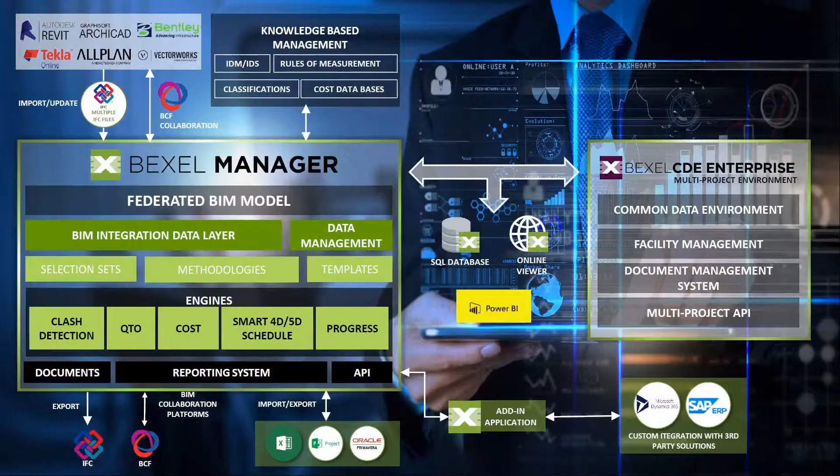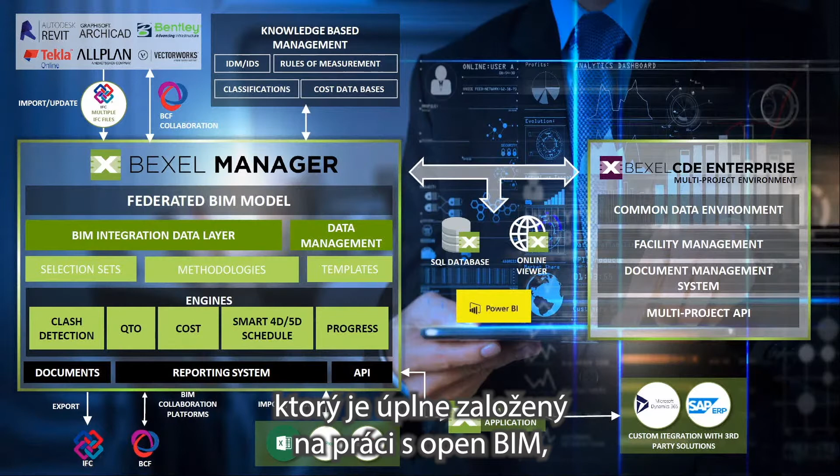So this is a bit complex system of BEXEL Manager, completely based on open BIM workflows, an integrated desktop and cloud-based application, what we say a single source of truth. From IFC-based BIM models, we have integrated clash detection, QTO, costs, smart 4D and 5D scheduling engines, progress monitoring, integration with various third-party applications. And today I'm going to show you the case study with the project where we are now finalists for buildingSMART International Awards. This is a large-scale residential complex in Belgrade, in our capital.

BEXEL Manager is used by a lot of top general contractors around the world, a lot of public companies like national railway and highway companies from Japan, Korea, Singapore, across Europe, Germany, Italy, Russia, and we are present also in the States and in Latin America. Our software is currently available in 7 languages, and we are working also on 8 new languages. Among them is Slovakian. We are developing this Slovakian version with our partners from Bratislava.

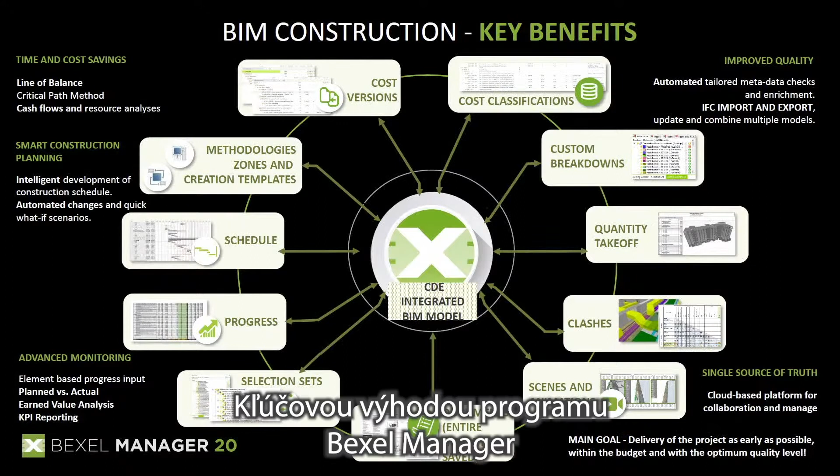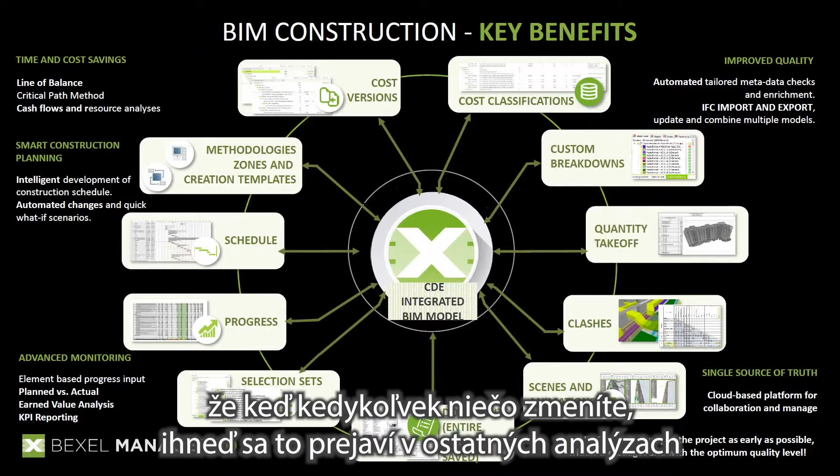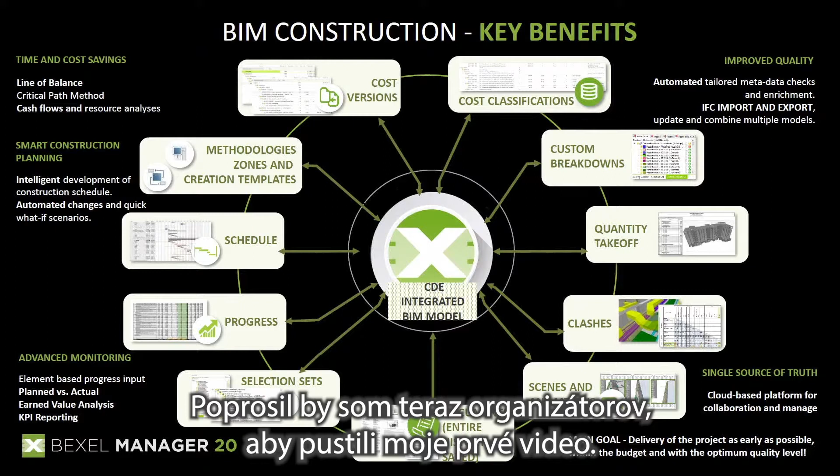So key benefits of BEXEL Manager are the integration of all data, from BIM models, custom breakdown structure, quantity takeoffs, cost analysis, and scheduling analysis in a single platform. And the biggest benefit is whenever you change something, the change has immediate impact on all other analyses, and you don't have issues where something is changed, updated, and something not. So I would like now to ask the organizers to start my first video.

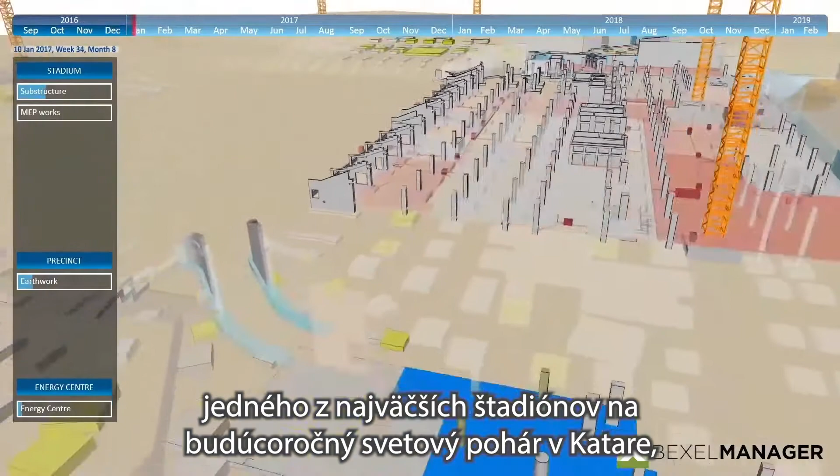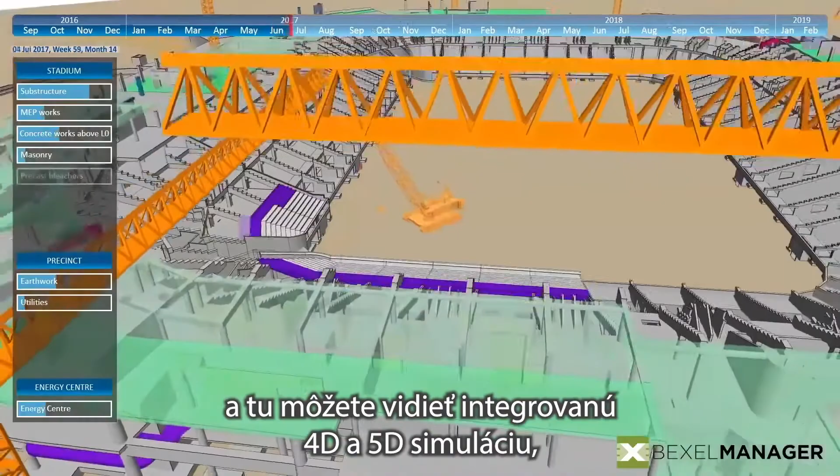In this video, you can see the 4D and 5D integrated simulation for one of the largest stadiums for the next World Cup in Qatar. This is a very complex model containing almost 1 million elements developed by 9 design companies, containing more than 100 IFC files. What you can see now is an integrated 4D and 5D simulation. On top, you can see the time scale. On the left-hand side, you can see the costs. The percentages are presented due to confidentiality of the information.

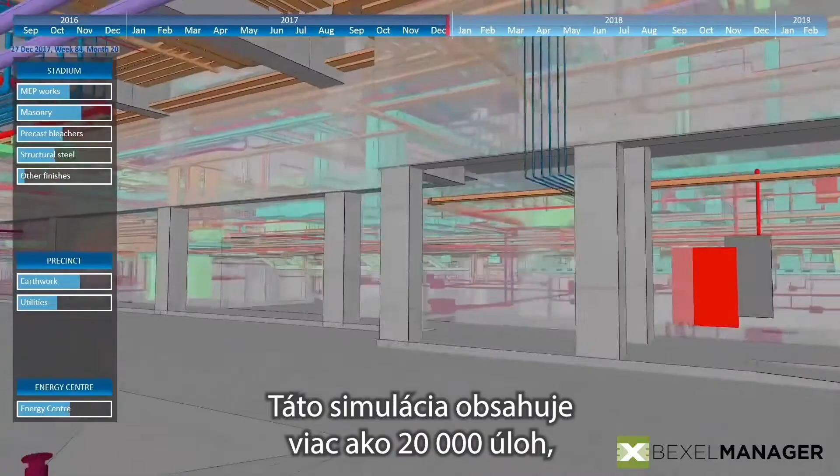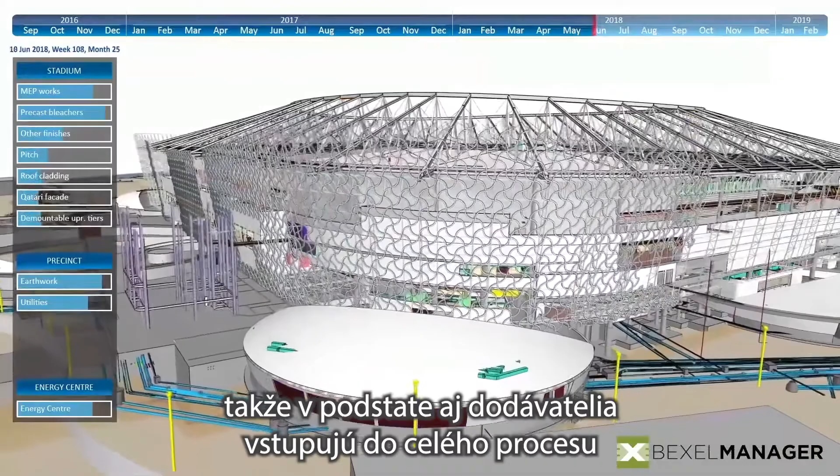This simulation contains more than 20,000 tasks, so extremely detailed, and the entire animation is generated automatically by using the BEXEL Manager intelligent 4D and 5D planning engine. This was used during the entire construction stage. Essentially the contractors enter the progress also by using the BEXEL Manager platform, and the various analyses were automatically produced directly in BEXEL Manager or exported to Power BI or Primavera.

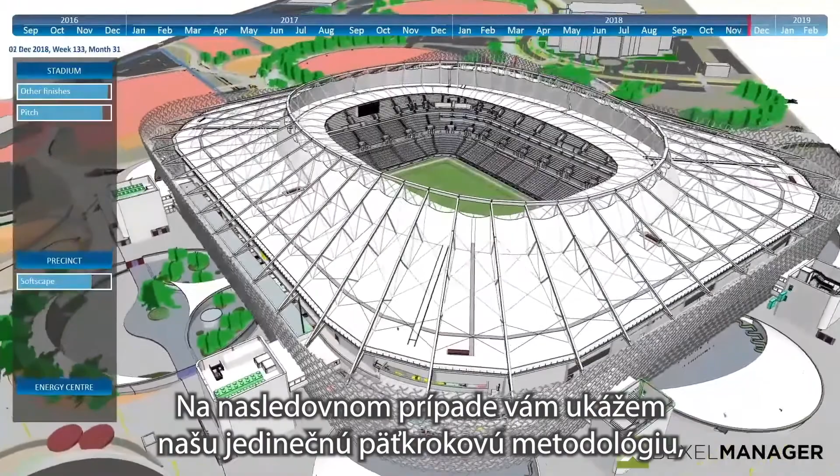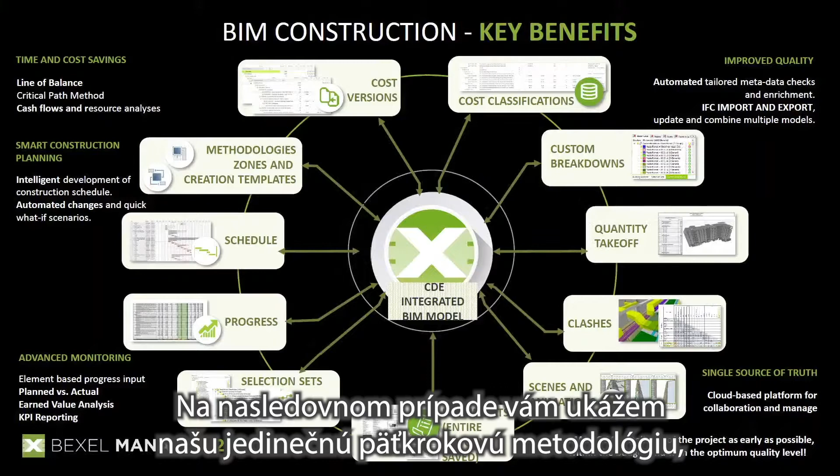So in the following live case study, I'm going to show you our unique 5-step methodology, where we start with the data integration, metadata checks, automatically generate quantity takeoffs, create cost classifications and budgets, define zones and methodologies, automatically create the schedule, and then track the progress and produce the various reports. So I would like to ask for a second video now, so you will see in 10 minutes how everything could be generated.

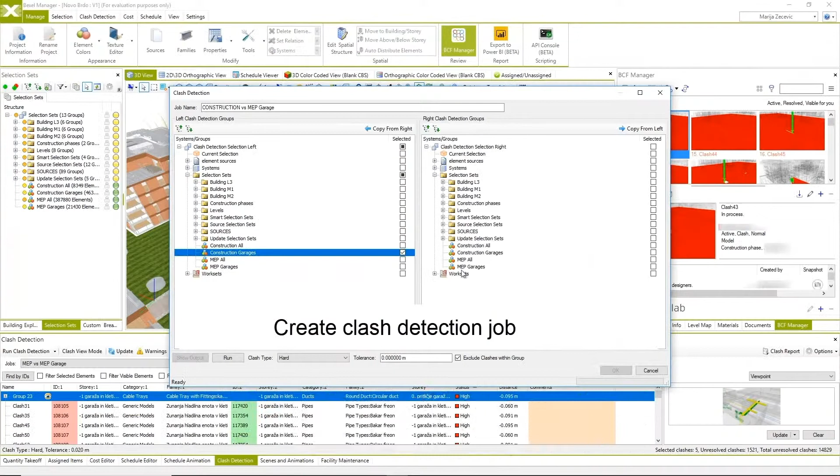So now we are importing 89 files. This is a large residential project in Ljubljana. Now when the files are imported, we can perform a clash detection, various tolerances could be detected and so on, and those clashes could be, via cloud, in this case with BIMcollab, uploaded and sent back to designers in order to improve them.

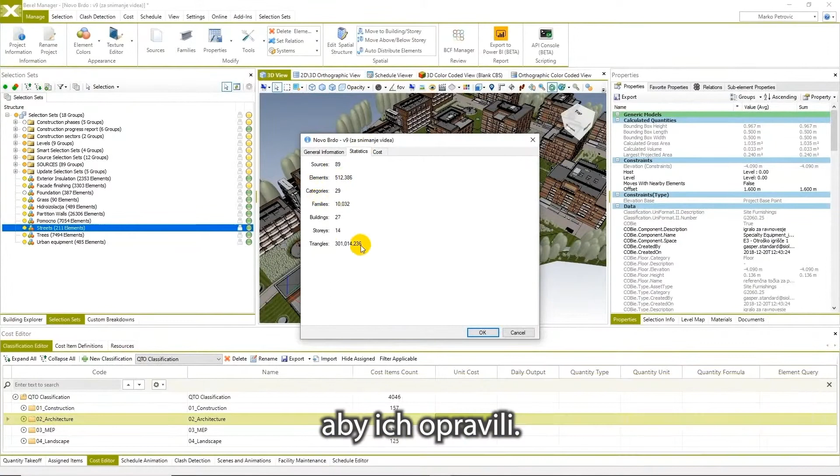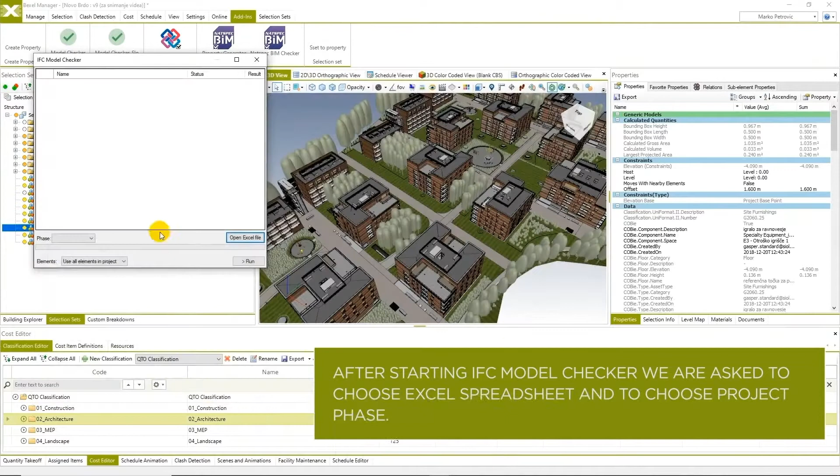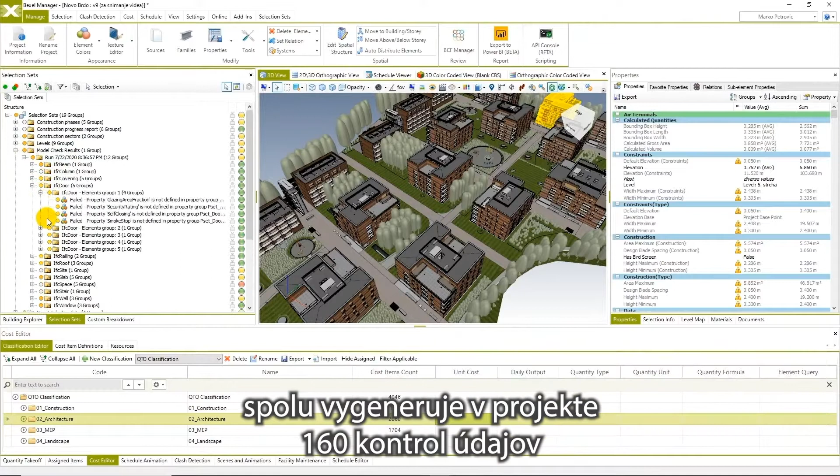As you can see now, we have slightly more than 500,000 elements, and the first stage is automatic data check. On this project, an IDM is developed, defining which properties are mandatory for each group, each category of elements in each stage. Now with a very small add-in in BEXEL, you are loading that Excel rule-based IDM system, and the system automatically goes through all the elements in the BIM model, and in total 160 data checks are generated in the project with more than 12,000 distinct selection sets.

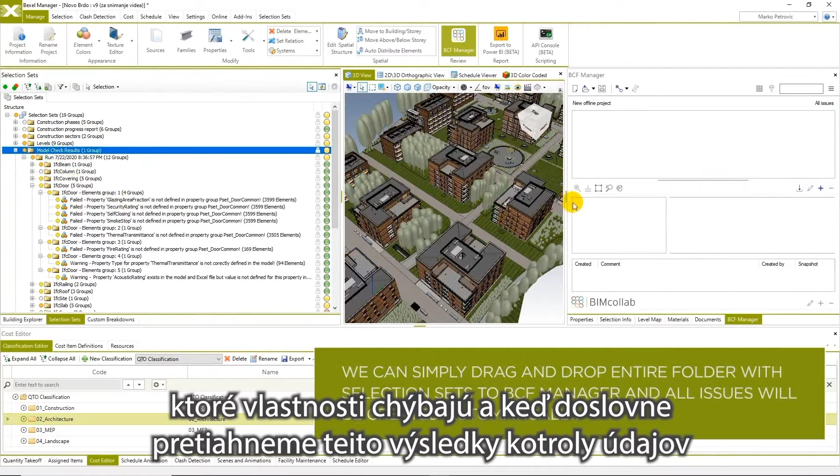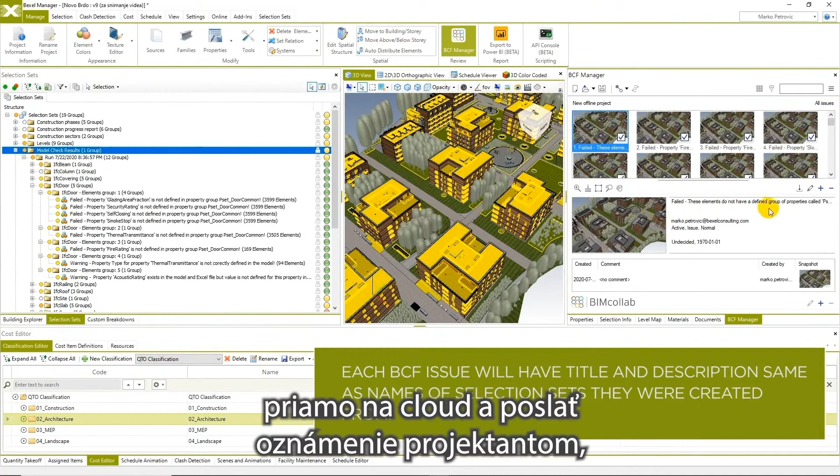Now on the left-hand side you can see that each group of elements shows us which properties are missing, and when we just drag and drop those data check results to BCF Manager, integrated in this case with the BIMcollab collaboration platform with BCF, we can directly upload those files to the cloud and send notifications to designers so they have the chance to change, add the properties and so on.

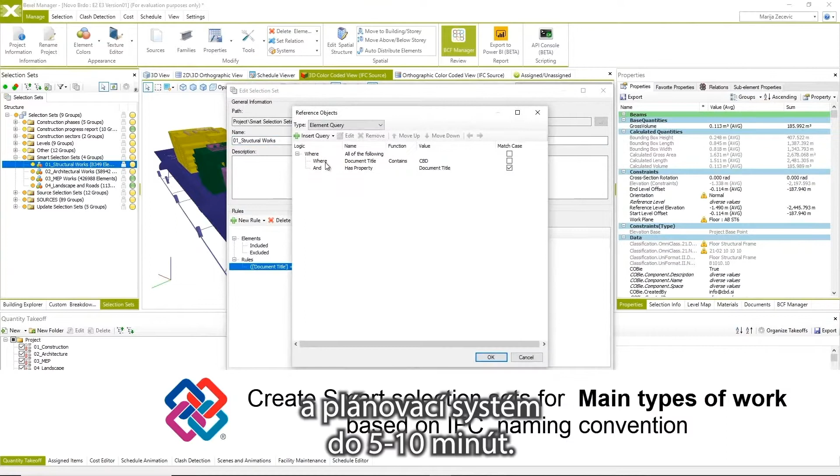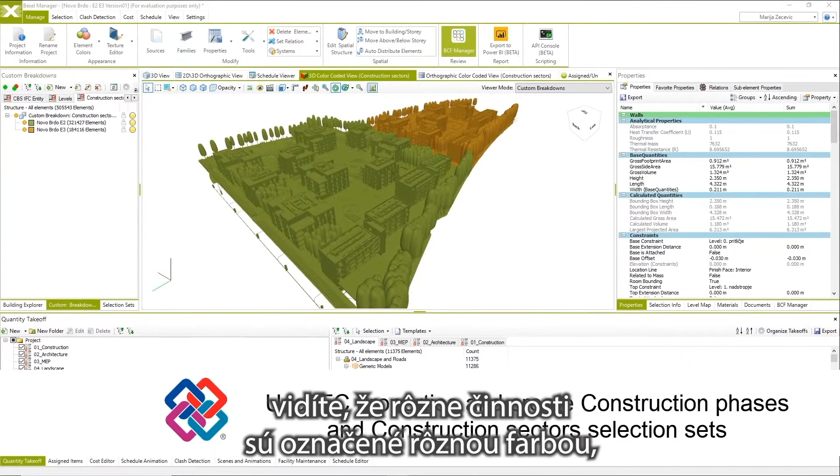Now in this part, I'm going to explain to you how the entire cost and scheduling system is generated in literally 5 to 10 minutes. First of all, we have the zones, which are automatically imported from IFC, so no additional work is necessary. We use IFC building, or in this case IFC story. As you can see, with different colors we have different activities.

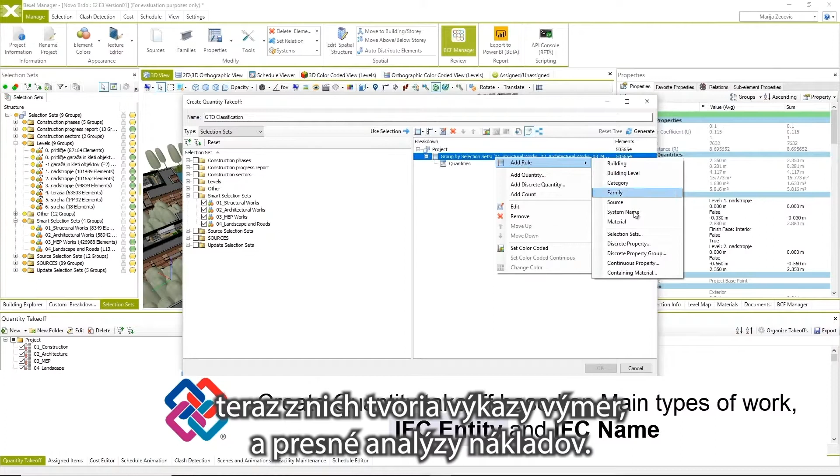Now we also saw two different parts of the project, because there are two agreements with different general contractors, and now, based on all properties read from IFC files, we are automatically generating a QTO, a quantity takeoff, and a customized cost breakdown structure. It's a fully flexible system, in this case organized by different types of activities, IFC entity and IFC name.

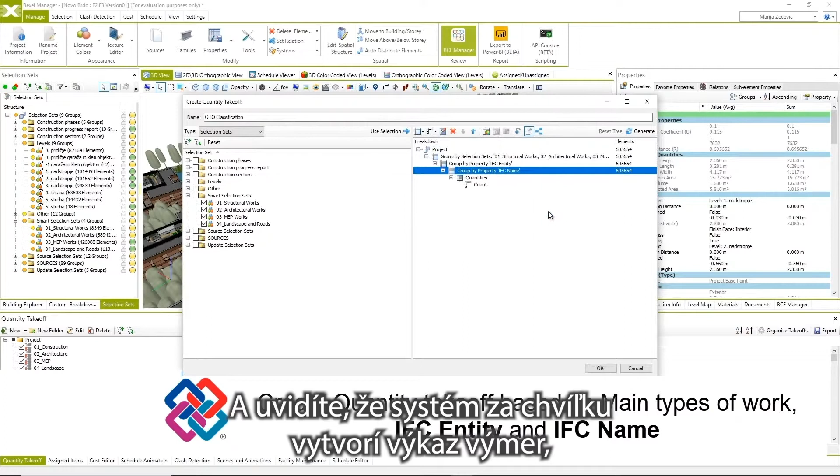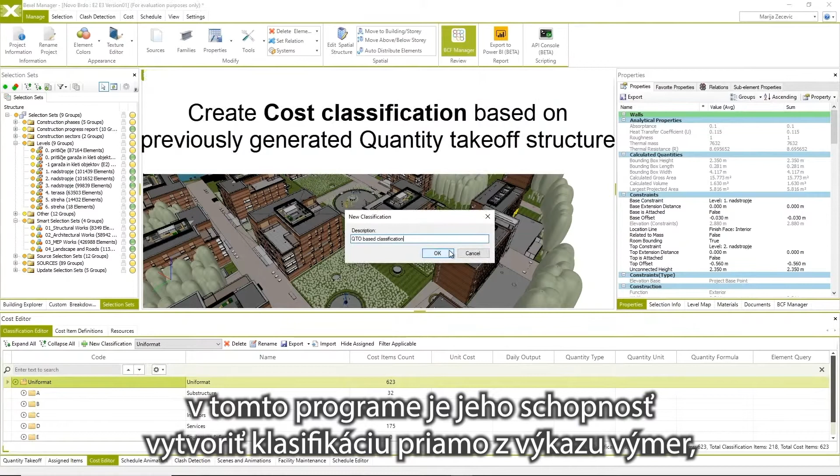And you will see that literally in a minute the system will create the QTO. In this case, we can see the number of elements, the areas, of course the volumes, lengths, any properties we have in the system. And now, one of the big automation engines in BEXEL is the ability to create the classification directly from the quantity takeoff. We call this QTO-based classification.

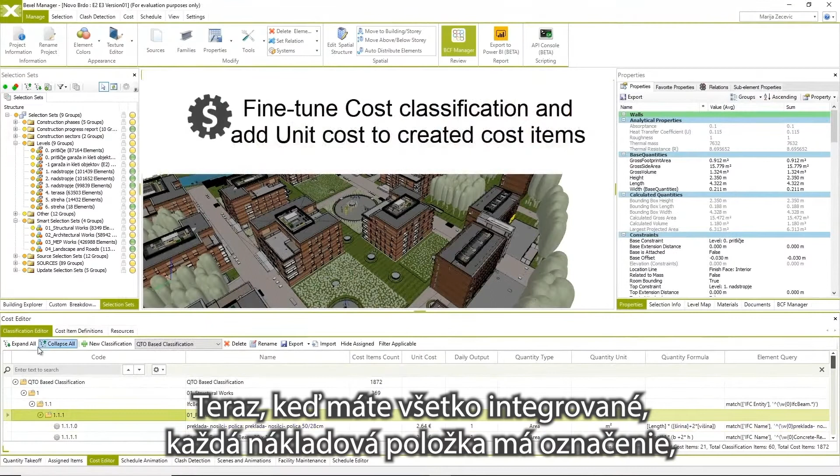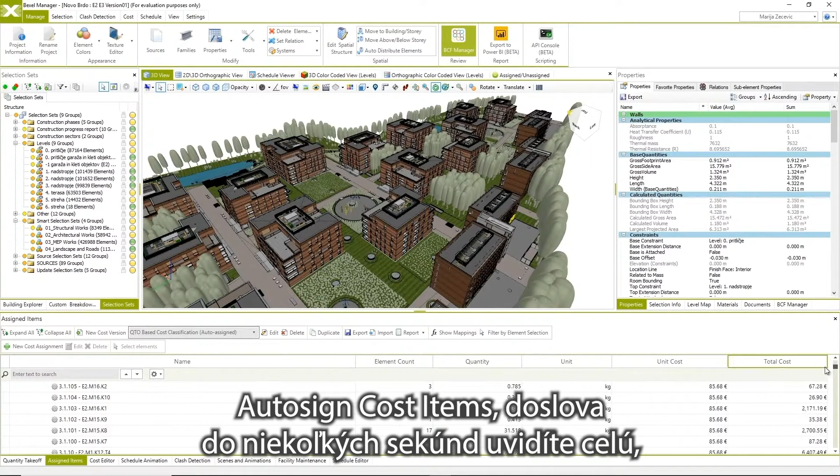Of course, in BEXEL, you can use any other standard classification like MasterFormat, Uniformat, Uniclass, DIN 276 German standard, Russian SMETA standards, and so on. Now when you have everything integrated, each cost item has a query, so it knows to which elements those cost items are supposed to be attached. There is a quantity formula which automatically allows us to calculate the quantities, and then when we click on another magic button, auto assign cost items, we literally in a second see an entire, very detailed, fully interactive budget or cost structure.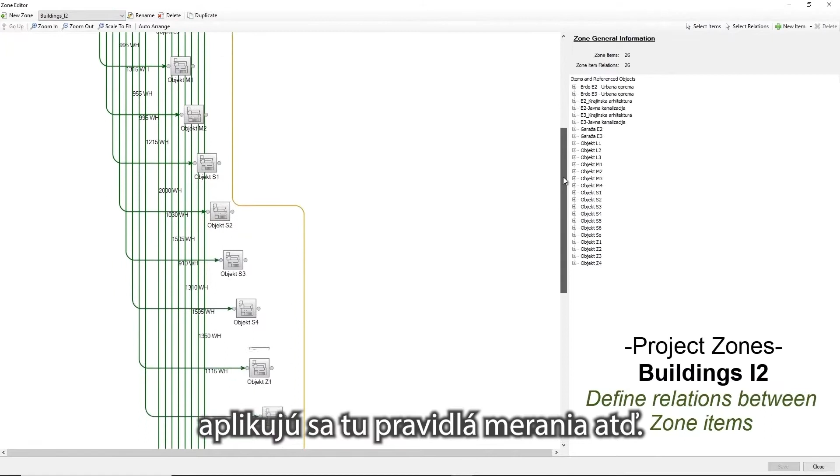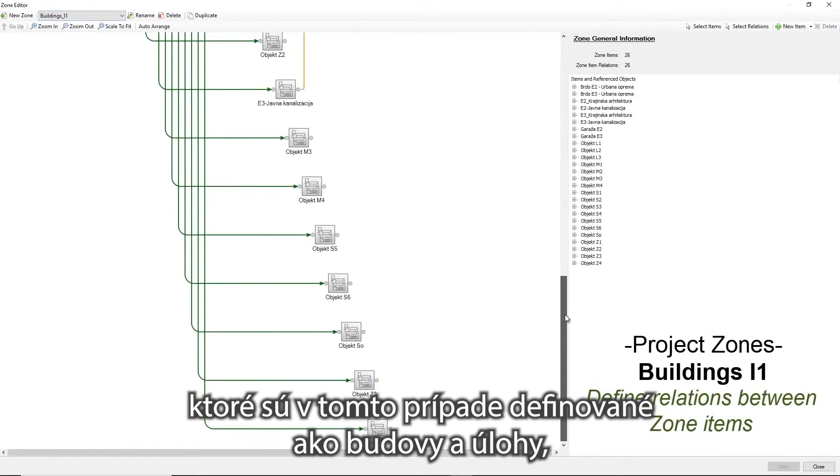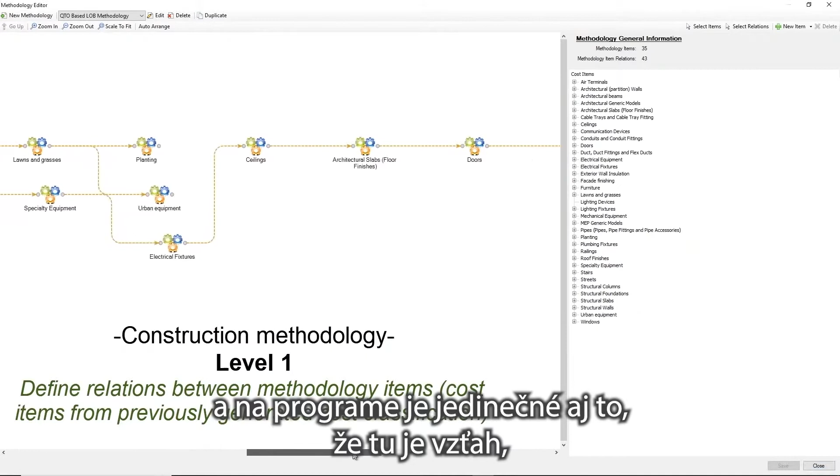So we see that with the latest updated version, the total cost is slightly more than 63 million euros. You see an entire formula-based system, so the rules of measurement are applied and so on. When we have this integrated, we can use in an intelligent way the zones and methodologies which are defined. In this case, we have the buildings and the task relations among the buildings. We have the relations among the building levels, and, unique for BEXEL, we have a relationship which in a logical way allows us to create the construction schedule.

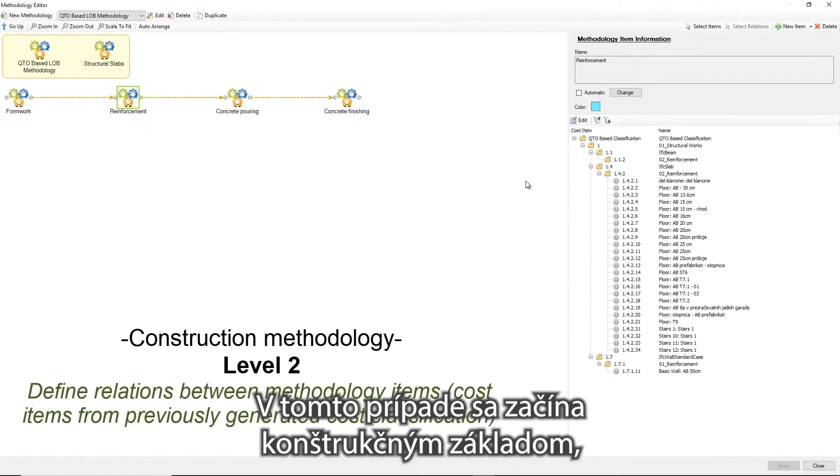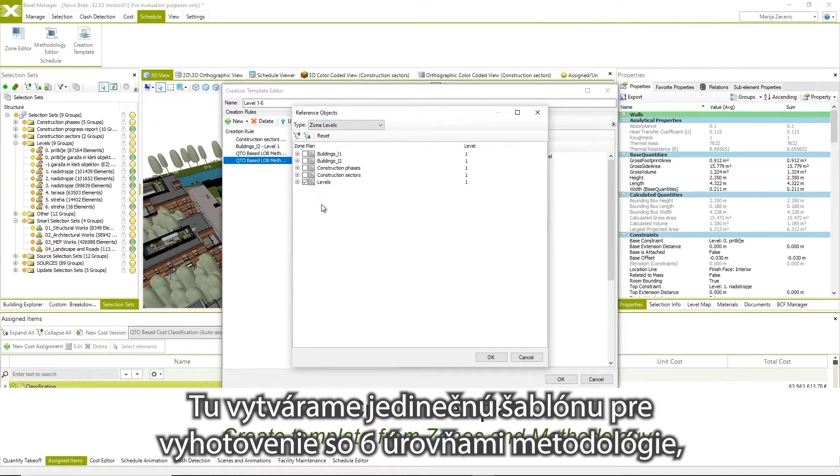So in this case we start from structural foundations and finish with the furniture. We can have more levels. Let's say in the slabs, we can have 4 sub-activities defined in the methodology: formwork, reinforcement, concrete pouring, and concrete finishing. What we are now doing is creating a unique creation template with 6 methodology levels. We have the 2 sectors for 2 general contractors, 22 buildings, a methodology with 2 levels, and building stories and the sub-phases.

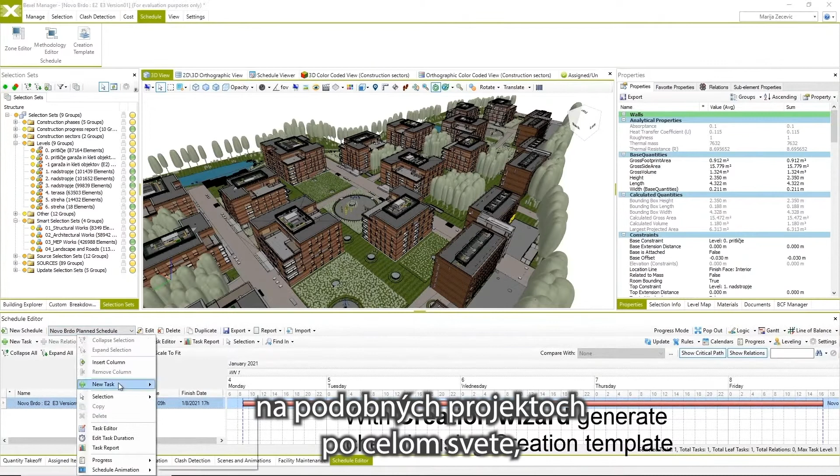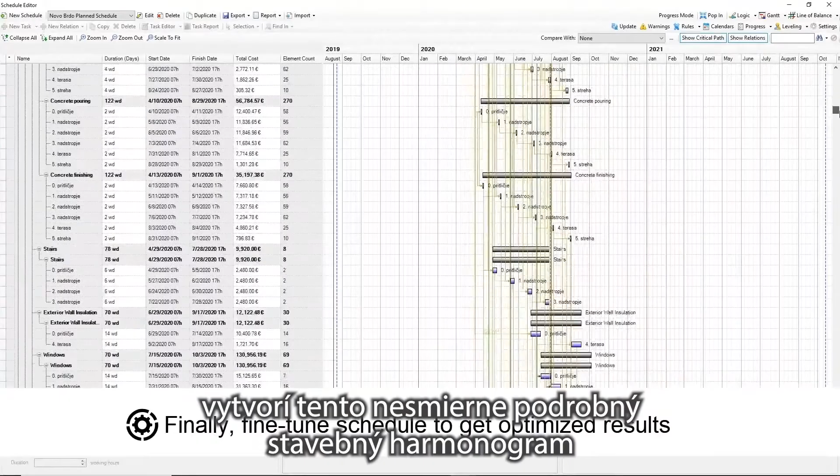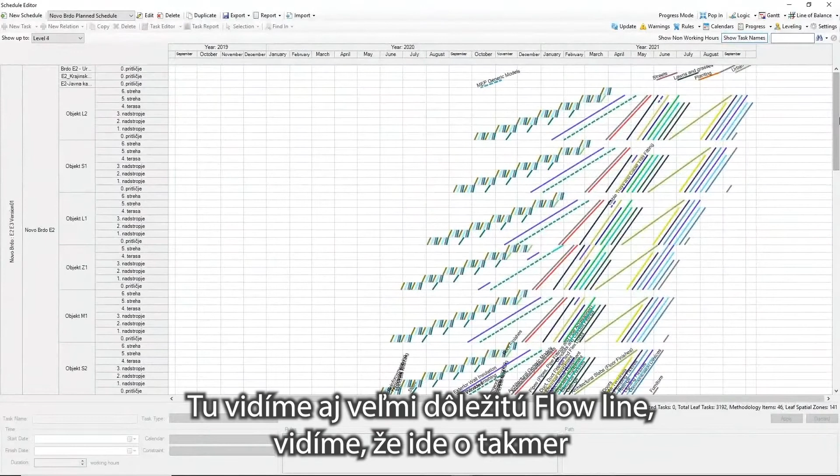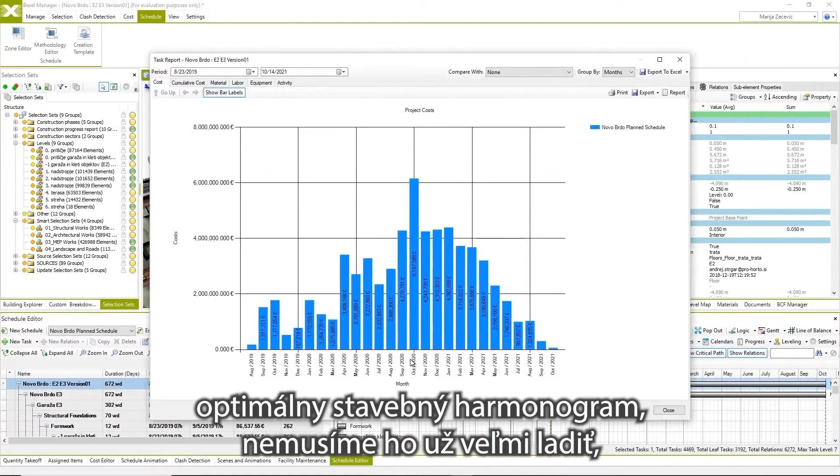When you have this defined, just to mention, methodologies are of course reused on all similar projects around the world, so just the phases need to be defined on each project. Now literally in a couple of seconds, the system automatically, based on this template, creates this extremely detailed construction schedule with all costs, and it contains more than 10,000 tasks and relationships. Now we can also see the very important flow line. We can see that this is an almost optimal construction schedule, so we don't need to fine tune it very much. We can see the cash flow analysis on an annual or daily basis, the S-curve, and all other analyses.

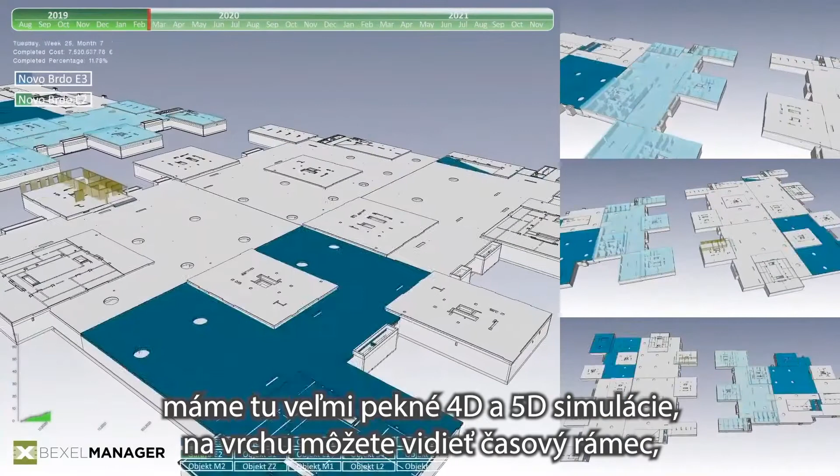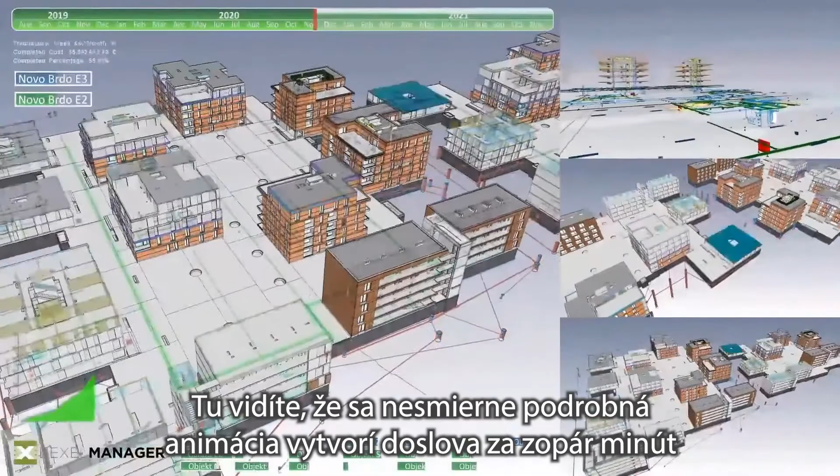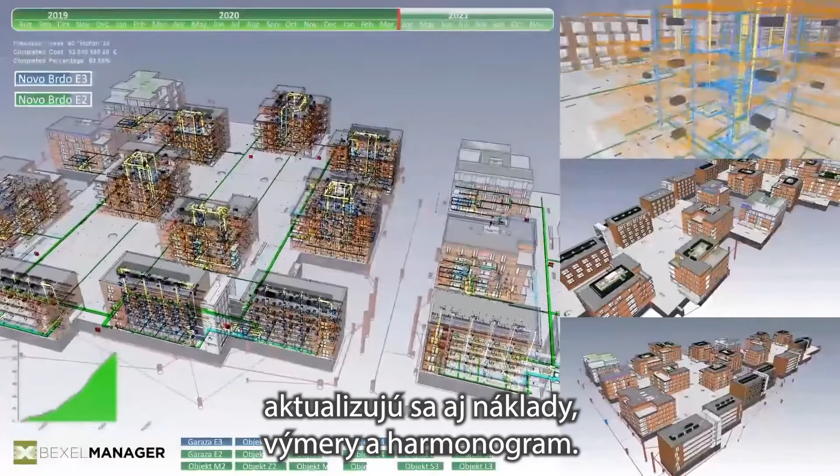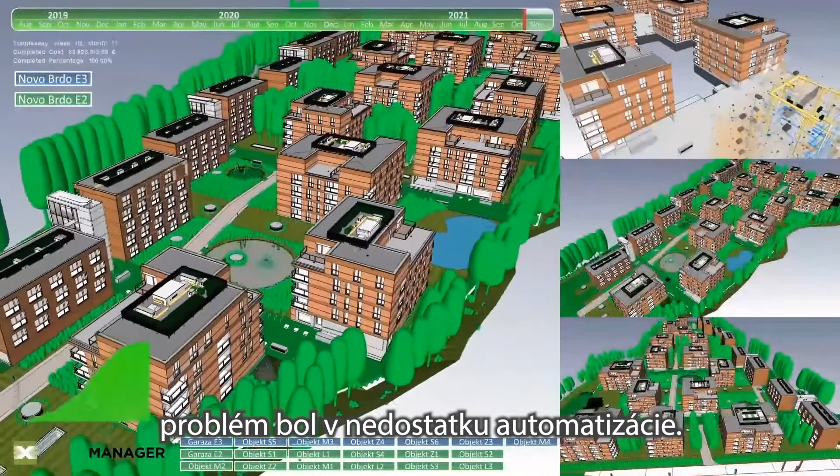And of course, what is also very attractive and useful for project construction management, we can see a very nice 4D and 5D simulation. On the top, you can see the time scale. On the bottom, percentages per each of the contractor agreements or each building. As you can see, this is an extremely detailed animation generated in a couple of minutes. One of the key benefits is that whenever you update the project, you see the updated cost, quantities, and schedule. The key reason why this was challenging before was not because people in construction are lazy or laggards in adoption of construction software, but essentially the problem was the lack of automation, and that's why we believe this is important and very beneficial.

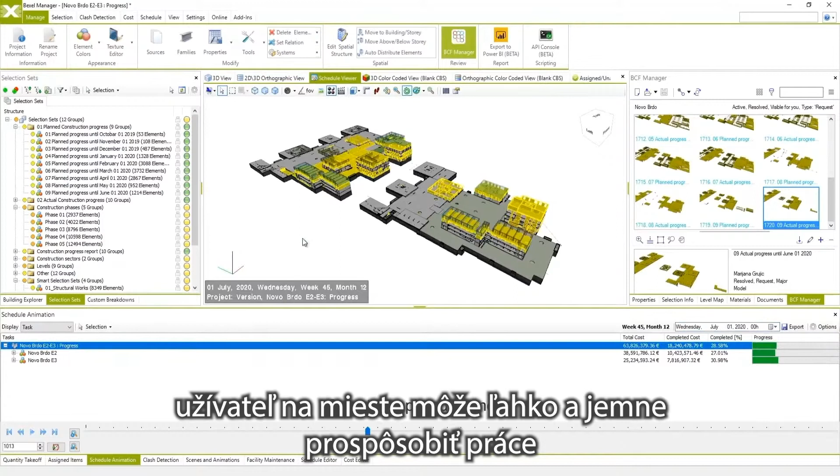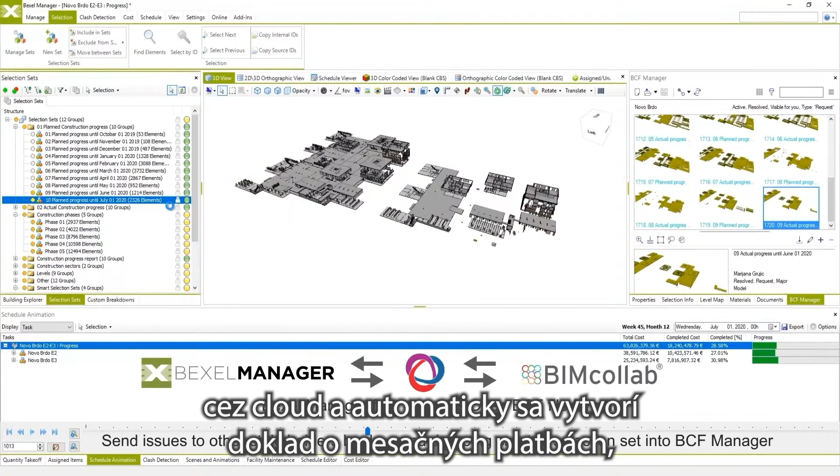The next level of our integration was the ability to integrate the progress automatically. Now we are sending the progress to the construction site, and as you can see, the user on site can easily adjust what is done in the respective month and import this back into BEXEL Manager via cloud. Everything is done, and a monthly payment certificate is automatically generated. So it's a tremendous cost saving. Doing this manually usually takes a couple of weeks every month just to collect and calculate all actual quantities.

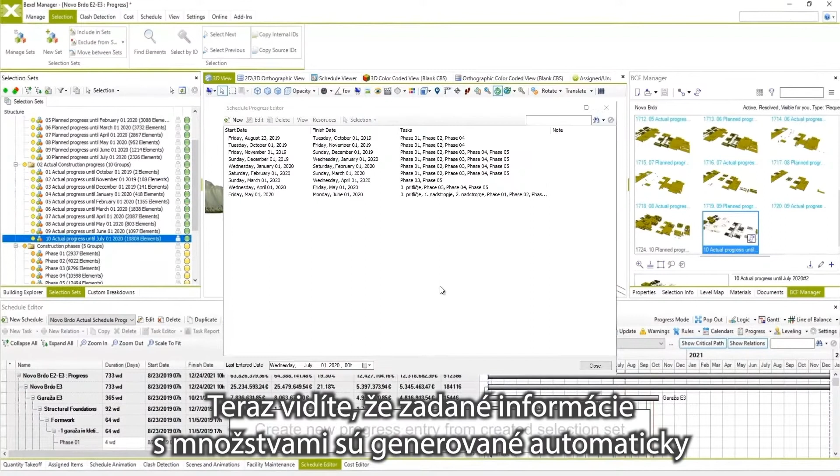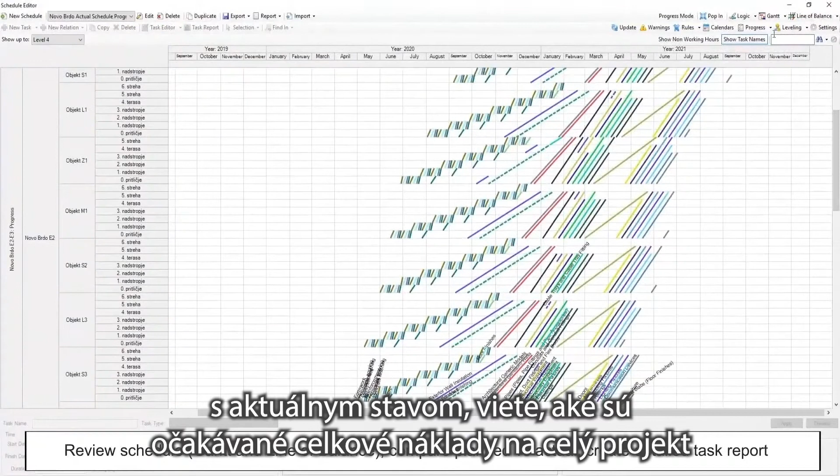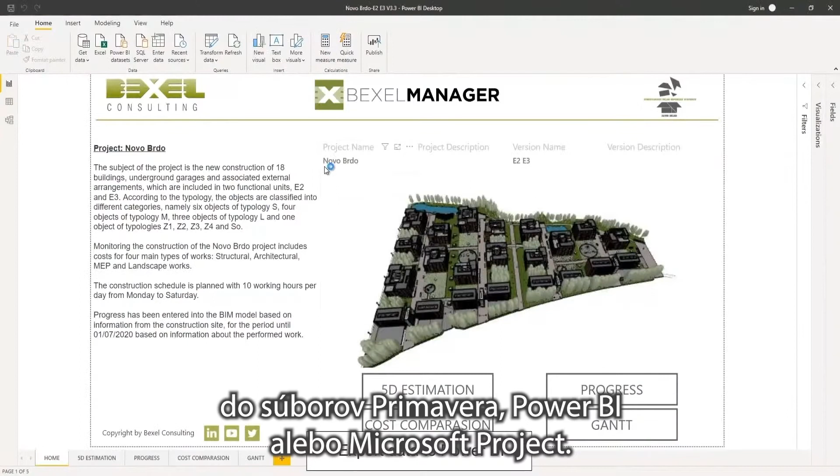Right now you can see that the entered information with all quantities is automatically generated, and when it's done, the system can also automatically produce earned value analysis, planned versus actual, so you always know the expected total cost on the project. And of course, if you want, you can export all this earned value analysis with actual costs and new total costs to Primavera, Power BI or Microsoft Project. As you can see now, those are sample reports automatically generated in Power BI.

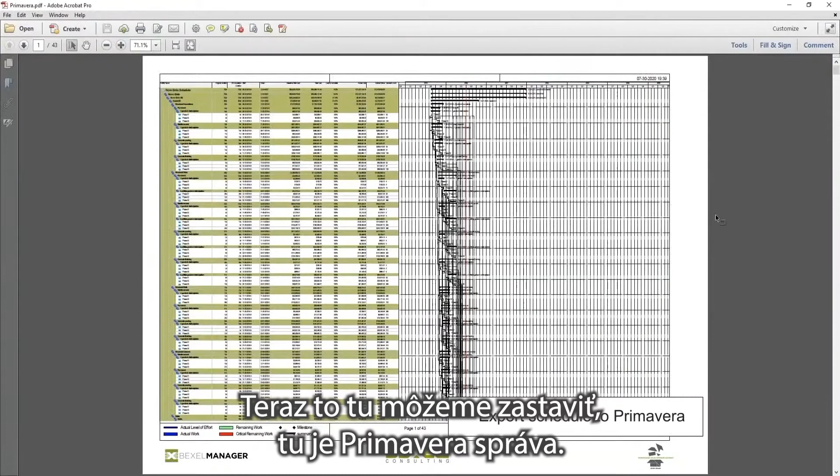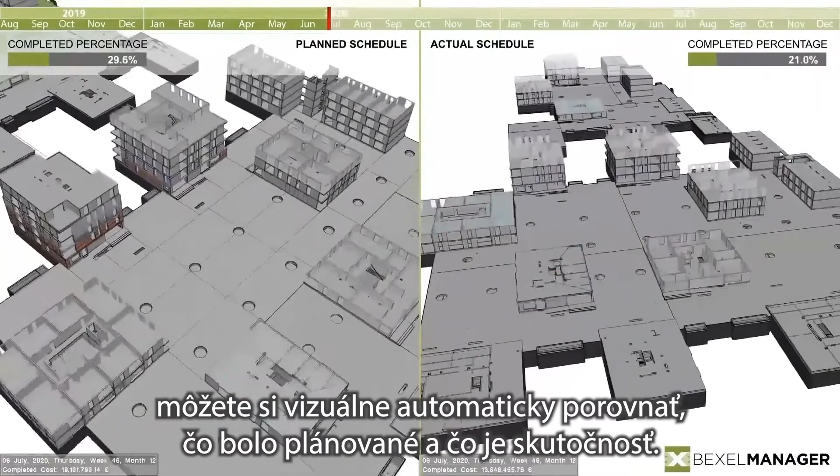And now we can stop this video just to switch. This is a Primavera export. You can see a planned versus actual analysis, so essentially you can visually compare what is planned and actual automatically.